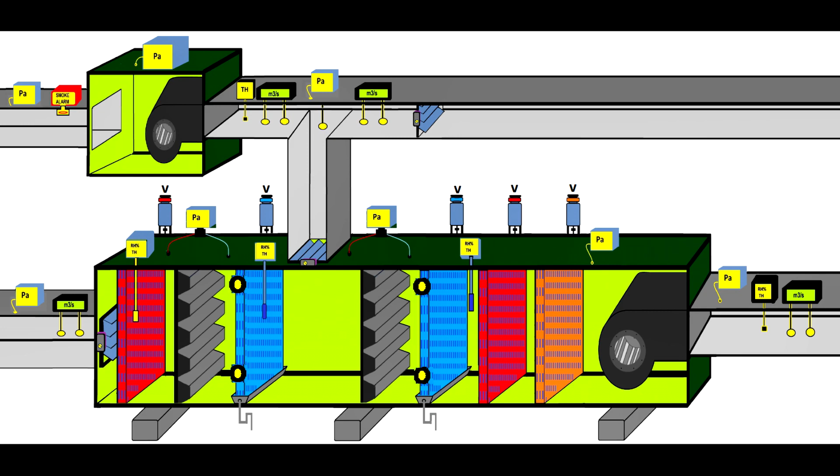Within this mixing chamber, the recirculated air converges with the fresh air intake. This variant of AHU is equipped with 3 essential dampers, each serving to regulate the intake of fresh air, recirculated air, and exhausted air.

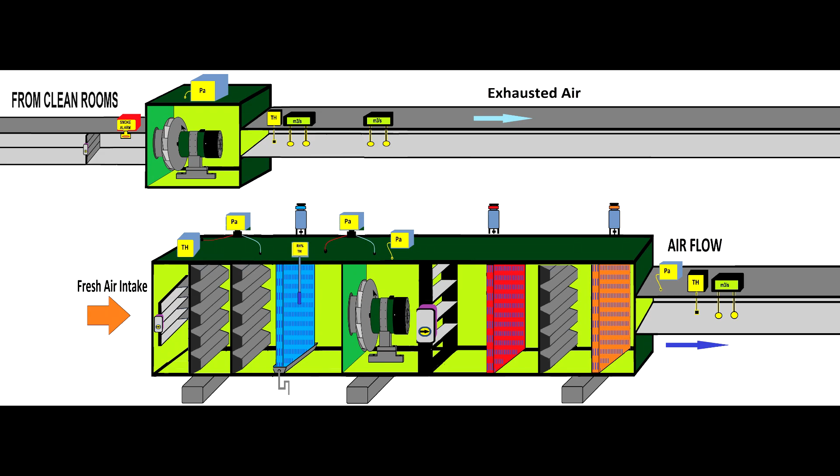Diverging from recirculating air handling units, the air handling units relying solely on fresh air necessitate swift responsiveness to fluctuations in air temperature and humidity. Consequently, achieving optimal temperature and humidity levels mandates superior control mechanisms and meticulously engineered heat exchangers.

Given the potential for abrupt weather changes, the heat exchanger within this AHU type must swiftly compensate for variations in heat and moisture. This ensures that alterations in weather conditions do not impact the airflow's temperature and humidity in the air supply duct, upholding consistent performance.

In this particular cooling system, the utilization of glycol within the heat exchanger is pivotal for regulating air temperature effectively. The glycol, initially entering the heat exchanger at a consistent low temperature, serves as the primary medium for heat exchange.

The control of glycol flow through the heat exchanger is facilitated by a strategically positioned three-way valve. These valves play a critical role in modulating the cooling and moisture removal capacity of the system. Its precise adjustment directly influences the efficiency of the cooling heat exchanger in both cooling the air and mitigating moisture levels.

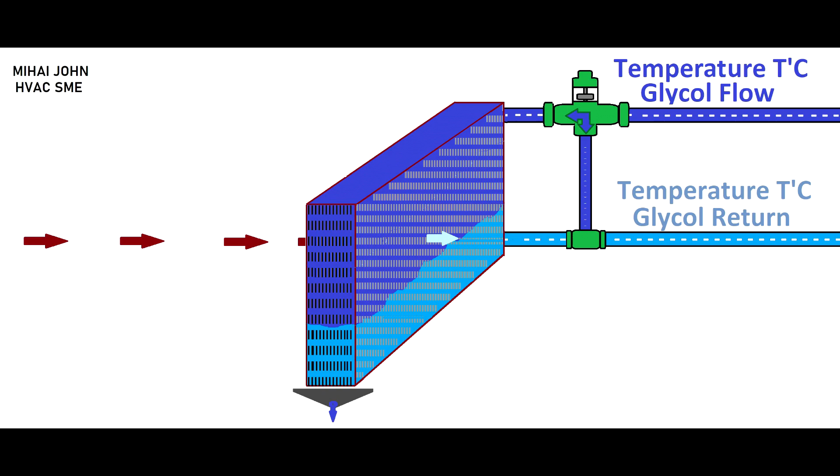The continuous and meticulous control of the three-way valve is orchestrated by the actuator, ensuring a seamless and responsive mechanism to maintain the desired air temperature and humidity levels as specified by the set points. This level of control and automation is fundamental for achieving optimal performance and operational stability in the cooling system and dehumidification process.

In the context discussed, the air handling units designed to exclusively intake fresh air and avoid air recirculation require meticulously calculated heat exchangers to precisely regulate airflow temperature and humidity.

While the video might portray an appearance of perfection, I will elaborate on the control philosophies of a site that leads to temperature and humidity fluctuation within the clean rooms.

Watching this video, it becomes evident that the heat exchanger's capacity is regulated by a combination of factors such as glycol temperature and glycol flow. These factors are managed through valves which are progressively adjusted by actuators following instructions from PLCs, programmable logic controllers.

Up to this point, the control mechanism appears sound. However, a critical error lies in the control philosophy's design, specifically concerning the placement of the temperature and humidity probe.

The temperature and humidity probe is positioned within the extractor fan duct. This configuration causes a delay in capturing changes in air temperature and humidity.

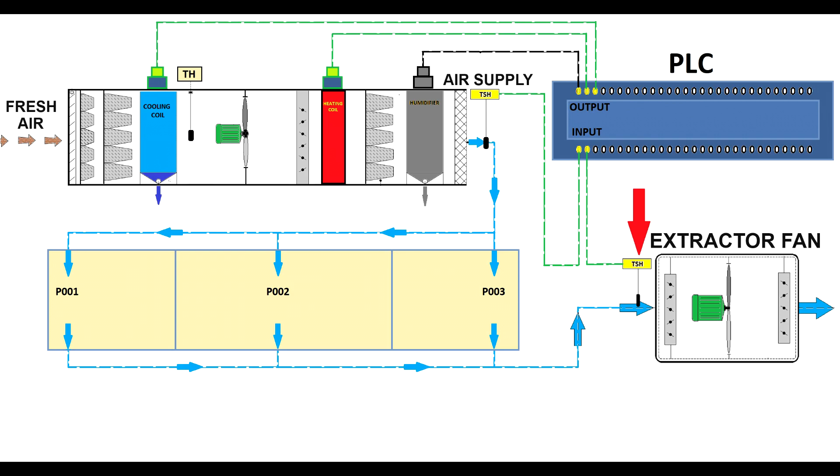Consequently, the PLC receives instructions from the probe situated in the extractor fan duct, resulting in delayed responses by the actuator. This delay manifests in the temperature and humidity trends as illustrated below. Regrettably, this delay in response can cause temperature and humidity within the clean room to deviate from the desired parameters.

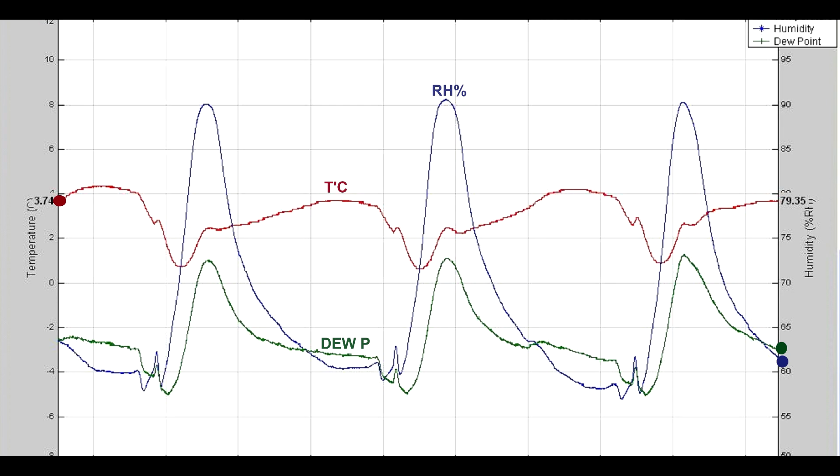Many engineers might begin to focus on identifying faults rather than evaluating the fundamental design. Insufficient understanding of the system can induce significant stress among engineers and attract scrutiny from management.

It is essential to address this control philosophy error to optimize the performance of the AHU and ensure a controlled environment within the clean rooms.

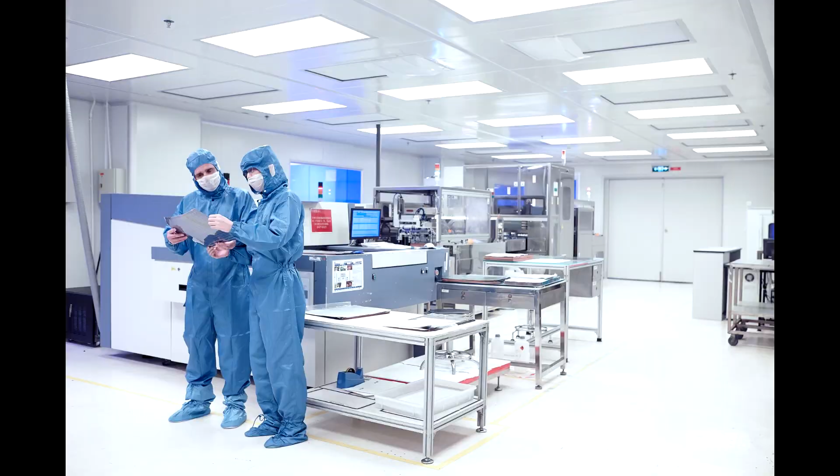If an engineer lacks sufficient experience in design analysis, they tend to focus on fault detection. Within the engineering community, there is a tendency to prioritize calibrated tools for evaluating air handling units' performance, sometimes overlooking the crucial aspect of design analysis.

Relying solely on trust in the design is not always the optimal approach. I emphasize this viewpoint based on my extensive 38 years of industry experience, during which I identified numerous design errors in AHUs from reputable companies.

In this context, our evaluation process involved measuring air properties before and after the heat exchanger, as well as monitoring glycol flow and return temperatures.

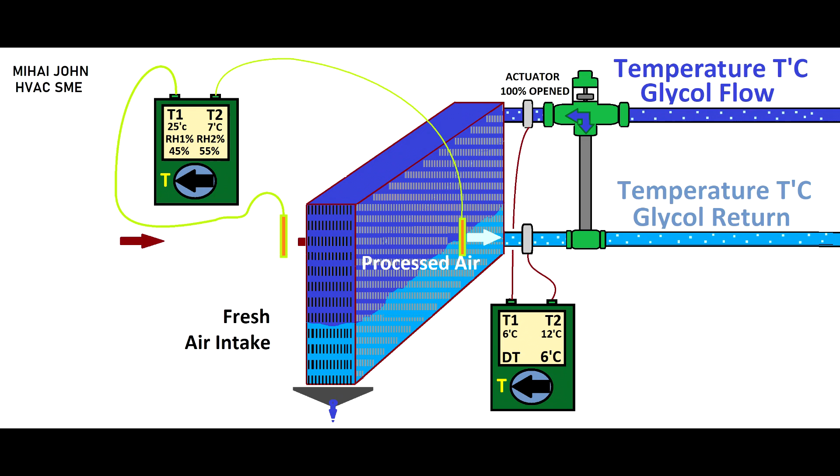This approach allows us to acquire a comprehensive understanding of the AHU's performance. Notably, we observed the glycol valve being fully open during these evaluations. Our objective is to accurately assess the cooling heat exchanger's capacity under optimal system conditions.

Prior to conducting fault evaluation, it is imperative for engineers to meticulously scrutinize duly validated documents, commissioning reports, and design specifications. In the event of unavailability or absence of requisite documents, the engineer must undertake comprehensive system analysis to effectively proceed with the evaluation process.

In this case, the engineering team is currently conducting an in-depth investigation into a potential fault associated with elevated glycol flow temperature. It is essential to clarify that attributing a fault directly to the air handling unit might not be accurate, especially when the glycol is sourced from a third party. The issue could lie within the chiller system, impacting the AHU heat exchanger functionality.

It relies on chilled water temperature to effectively cool the air that passes by. In instances where the temperature control system exhibits anomalies, pinpointing the root cause can be challenging, particularly if the design or control system is suboptimal. A poorly designed system might not provide detailed insights into the specific reason for the temperature control failure.

Instead, it might present a generalized problem of elevated temperature within the premises, leading to confusion amongst engineers tasked with managing the AHU. This lack of precise information can result in frustration and hinder the troubleshooting process. Clarifying these potential complexities and nuances is crucial for an accurate and efficient resolution of the issue at hand.